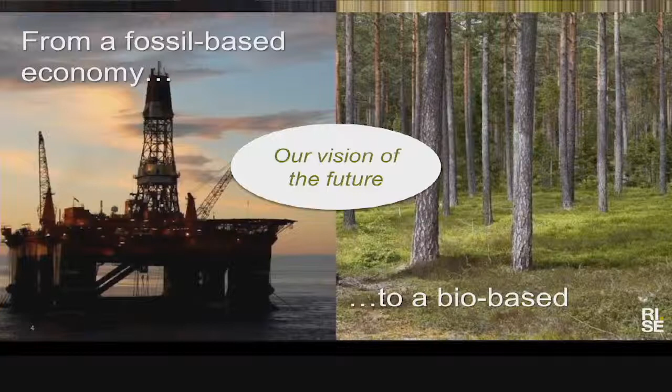We want to get from a fossil-based economy into bio-based. This changed - from the beginning I also used to quote Sheikh Yamani, and we used to say we wanted to go from oil-based to bio-based. But as we are making fuel and oils from the forest, we can't say that. So it's a fossil-based economy we want to avoid, and we want it to become bio-based.

Once upon a time we had dinosaurs, but dinosaurs has also become the definition of something that disappears, that is obsolete and not really adapted to the world they are living in. Observe the dramatic sky, and observe the silhouettes of these dinosaurs to be - I think they are strikingly like, at least I can see the T-Rex in them.

Every second we are pumping 150 tons of crude oil, which is ex-dinosaurs and their nature. 95% of it is burned, 5% is used to make materials or chemicals.

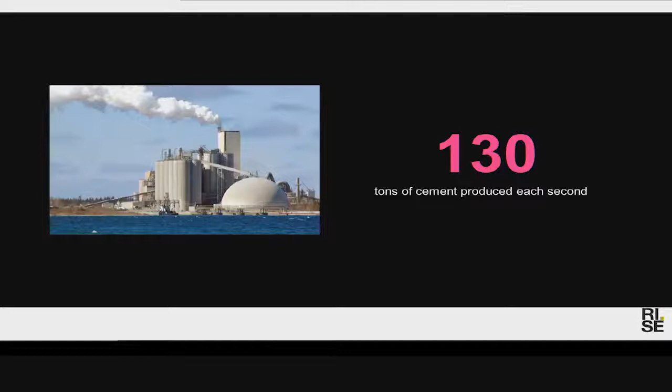But this is our competition if we want to construct and build. Every second we are producing 130 tons of cement, which is then mixed with gravel and other things to become concrete. Each second, it equals 130 tons of carbon dioxide produced.

And then I sound like a sect preacher when I say that we are producing 3,000 tons of cellulose each second. Cellulose is binding, collecting, and storing carbon dioxide. So of course we should work with cellulose. It's not all cellulose that you can find in trees, but trees are a big collector of carbon dioxide and a big source for cellulose.

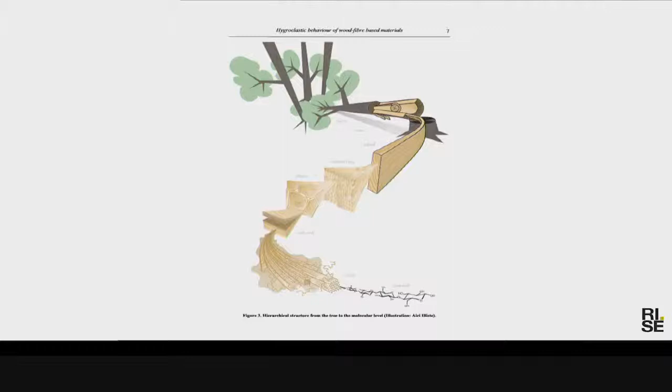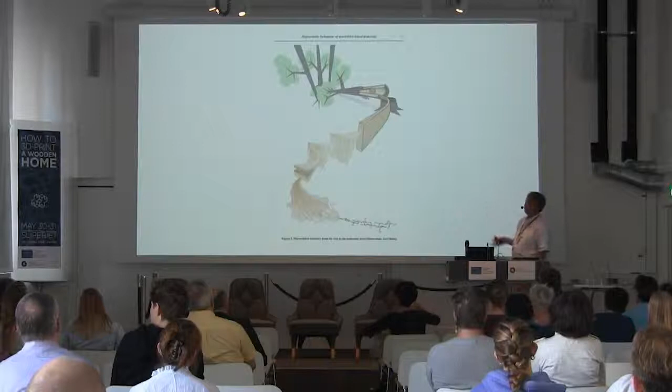And you saw this, or a type of this. We have the forest. We are making, using round timber, construction timbers, and then we are disassembling it into fibers and fibrils, and also using the nanocellulose, the sugars, or the lignin, which is the glue that binds the cells or fibers together, or the hemicellulose or extractives. So we use the whole tree more or less, and especially at Processum you are a biorefinery taking care of all the parts. Most of these parts can be used for construction.

And the question David raised - how do you define wood? We say wood-based, or we think that anything that we take from the tree, we can call it a wood-based material.

We got the question about CLT, or cross-laminated timber. Solid wood as CLT, timber, or glulam - it's excellent building material, and they should continue to be used, they are really excellent materials. But if we want to go further, we have to replace a lot of concrete or oil-based materials.

There is an increased claim for recycling. We have to think, how can we recycle materials? How can we make a cyclic economy out of this? We need to enhance the property space. If we want to replace a lot of materials with cellulose, we also have to give cellulose different properties. We have to produce materials that can do other things.

I'm a material scientist, and I would tell you that materials are boring and not interesting at all. But their properties, wow, that's something. So I'm interested in how we can tweak the properties, how we can combine material properties into new combinations where we can replace or make better design, better products than we have done so far.

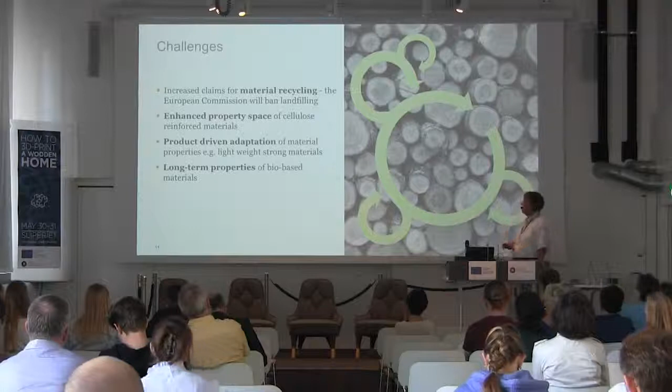And the long-term properties of bio-based materials is tricky. Sometimes you want to compost it, and sometimes you want it to last for hundreds of years. So we have to be able to control it.

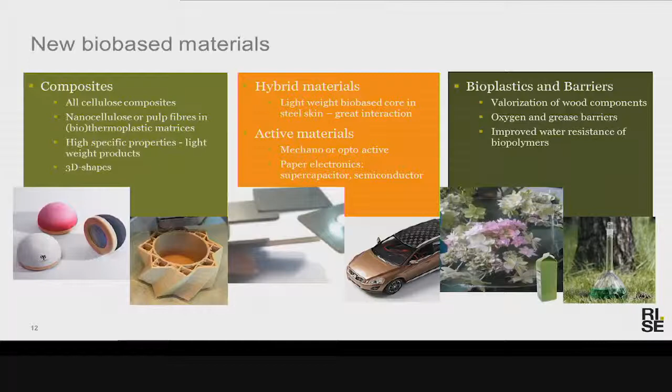These are the types of bio-based materials that we are working with. We're working with what we call all-cellulose composites - that's sort of binding fibers or sawdust or other wood components together using nanocellulose. We are using nanocellulose in thermoplastics. We are making all kinds of interesting things. We are making biocomposites where we put a metal skin on them and we get steel properties at a third of the weight of steel.

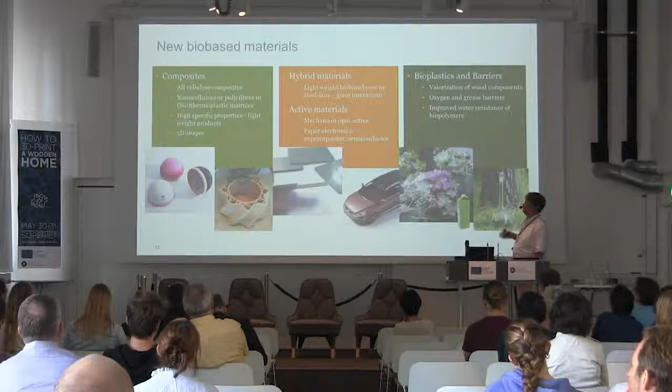We make materials that can interact on some kind of stimuli. They will move or change color or shape. And we are making bioplastics. We are making films. We are making all kinds of things. And this is sort of what's already known.

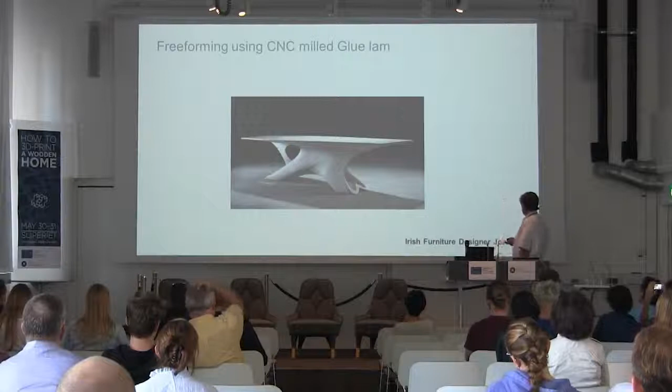Brave New Wood, we had a project. We are working on making wood composites that can be extruded. This is what's done with Joseph Walsh, who is doing the CNC milling. We had a question: why can't we continue with CNC milling? I think if we want to make exciting shapes, change forms, and have another design language, CNC is fantastic.

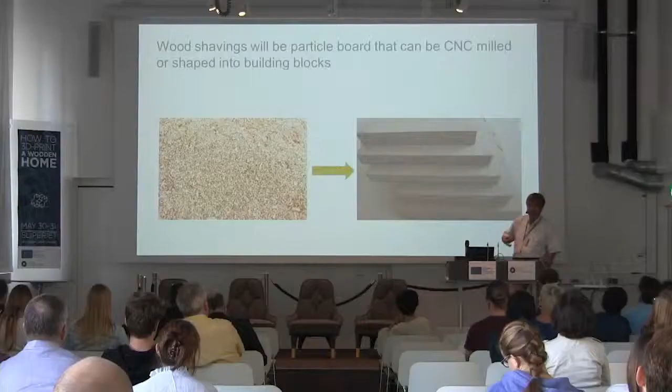But it's subtractive, and you get a lot of shavings. And of course, this is an excellent source for making particle boards that then can be CNC milled and so on. So we can take care of everything if we continue that way.

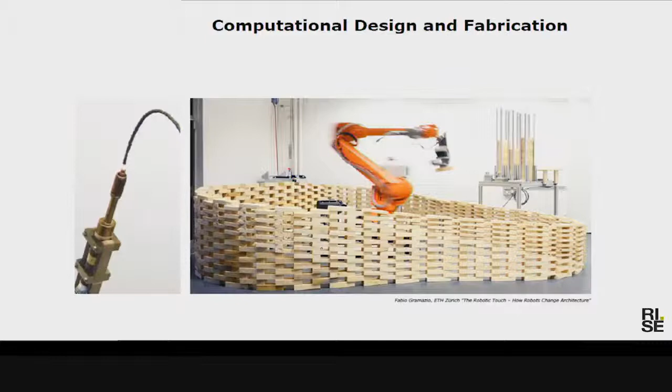There's happened a lot of things with computational design and fabrication. This is from Gramazio Kohler at ETH. They have robots that are laying bricks, for example. And this is the biggest wooden roof that has been constructed completely by robots. It's a gigantic, fantastic roof and ceiling at the same time.

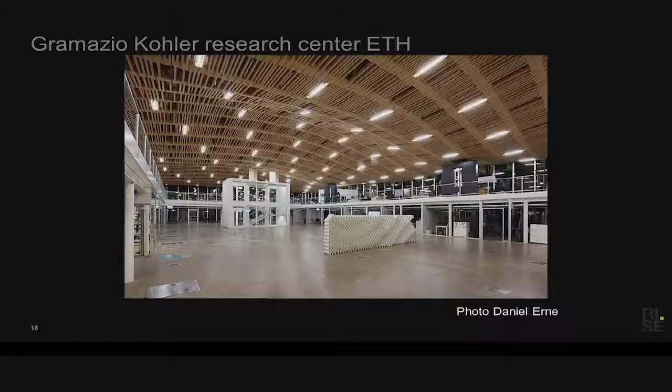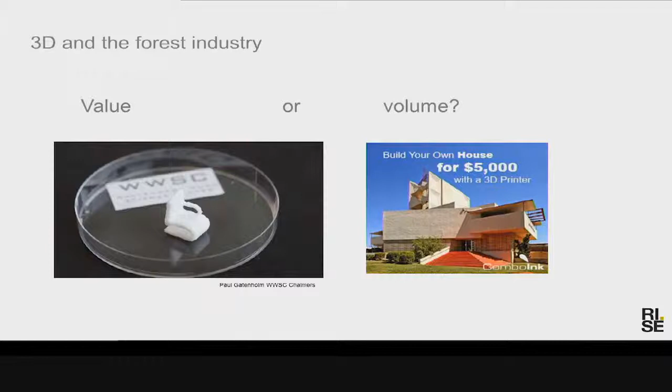And then I've been asked by our forest industry: is there any future in additive manufacturing? What should we do? We have Paul Gatenholm and the Wallenberg Wood Science Center. They are printing in nanocellulose, trying to make spare parts like noses and ears or organs. That's not a big volume, and our industry, sorry to say, cannot handle a few millions in profit. It has to be billions in order to make them understand.

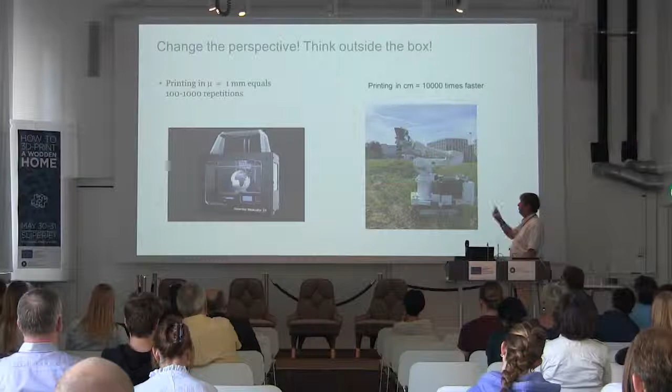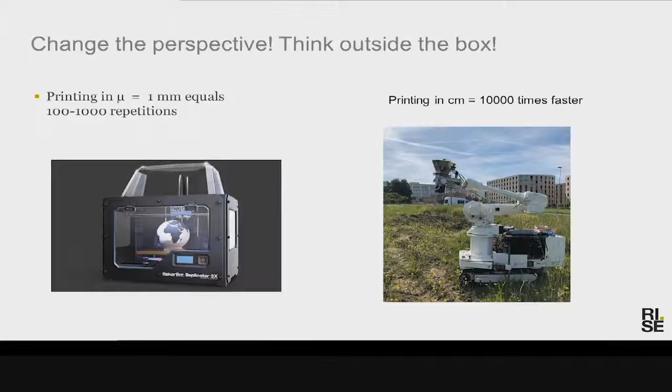So volume, maybe we have the volume in the construction and building part. And we also think that we have to think outside the box. When I visited ETH in Zurich the last time, it's a fantastic campus. They have cows grazing around the buildings. But this day I found a robotic arm on large feet walking around on the grass. They are going to construct a building using this robot out on the field.

But if we want to continue to build on this, if we have super light, strong materials, we can build on top of the old constructions. Many of the big cities are on river deltas. It's not very good ground. You have to put poles into the ground 30, 40, 50, 60 meters down. If you have lightweight materials, you don't have to. You can construct on land that was not good for building big concrete constructions.

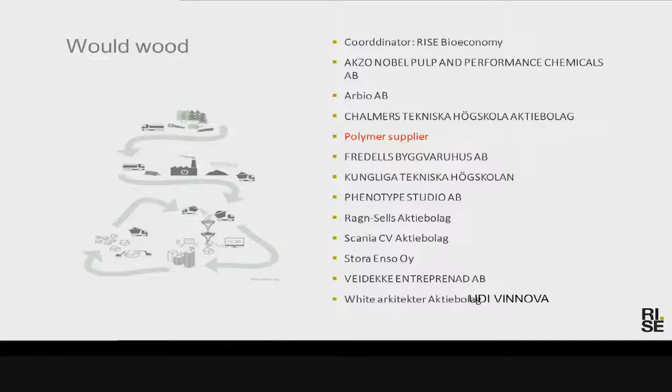And we just got granted, and we will actually start tomorrow, a project called Would Wood. It's about 3D printing with tree material, for the construction and building industry.

It's RISE. We are coordinating, but also Akzo Nobel, pulp and performance chemicals, they are taking care of the fireproofing and some performance chemicals. We have Arbio, which is Svensk Trä. They will take care of the communication part and make sure that it's spread to everyone.

We have Chalmers, the architectural school, which is a lot about the digital part, the digital tools. And then we have a polymer supplier, which we are negotiating with right now. Fredells, a do-it-yourself company, they want to look at the business model.

What happens if they have a giant 3D printer? If you want to make a balcony or a terrace, you can go and have your individual things printed out, or you can repair some furniture if you need a new leg for a favorite chair.

It's KTH, the Department of Mechatronics and Machine Design. We're going to work with the design of the printer heads. We have Phenotype Studio, who are architects specialized in wood and digitalization.

Ragn-Sells, they are recyclers. They want to know how we are producing these materials, how we are producing the artifacts on buildings, so that they know how to take them apart.

And then we have the truck company, Scania, because we think it would be very hard to print anything for the building and construction market and get it approved because of standardization things. But printing something for a truck interior is much easier. So that will be the thing that we can show, so that it will not just be a promise.

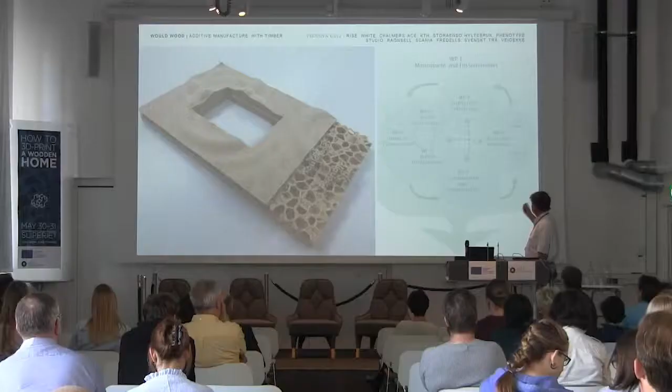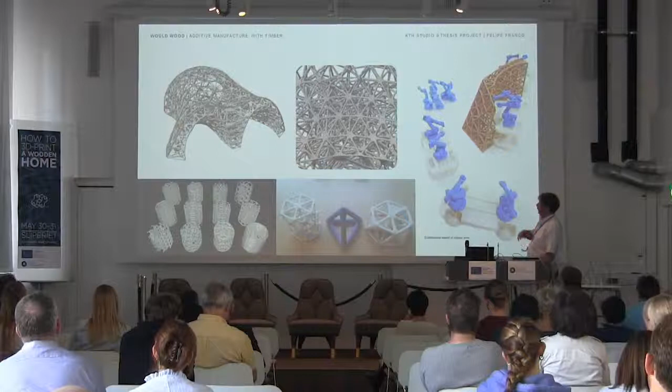We've done some pre-studies on when it's worthwhile to look at additive manufacturing. We've been looking at the space frame and how to do it. We didn't have the Magpie, but we did what we could. We've been looking at what kind of elements can be used when we want to build lightweight structures which we can put skin on.

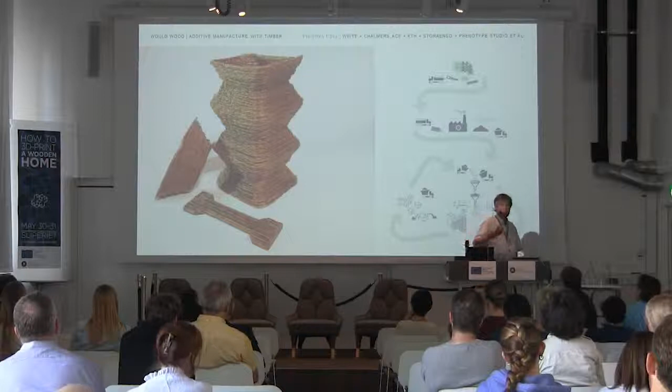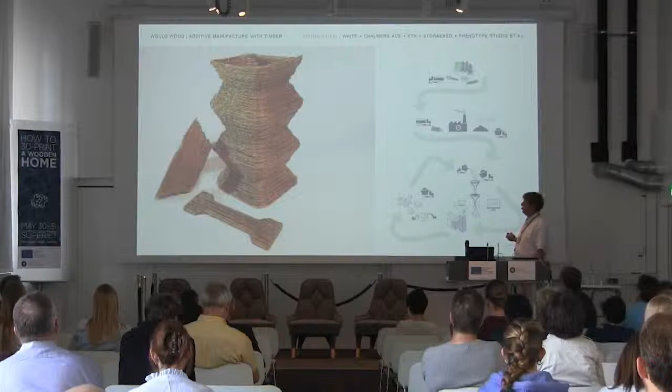We've also developed a new printer head where we can print with rope or yarn, which gives us fiber direction, so we can give materials different properties in different directions and control the strength in completely different ways. We've done this with both thermoplastics and thermosets. With a thermoset, we can build the space frame really three-dimensionally without doing layer-by-layer printing.

We've also developed, from wood at Rise Bioeconomy, carbon fibers from lignin. With this printer head using paper yarn, we can also feed man-made fibers like rayon or carbon fibers, giving us very strong reinforcement fibers in the material, because that's one of the big problems when printing with thermoplastics.

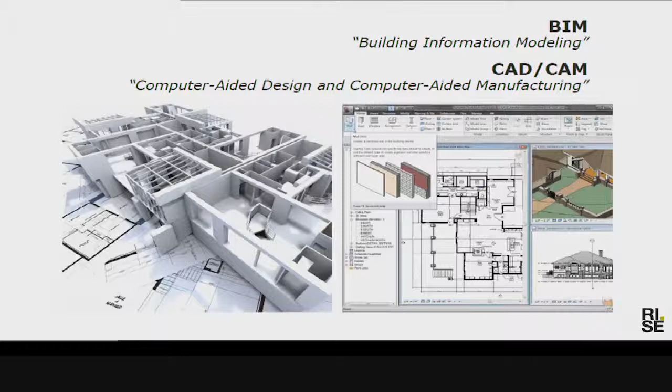Digitalization enables us, and we really believe this is the moment where we can do a lot of things due to this. You have the CAD, the CAM, the BIM, but we have to get them to work together. That's mainly the biggest task for our project, to make sure we get all these things going together.

The approach we have in what we call material design is research, design, and development. We think it's important that the design part comes before the development part, because we need the communication and discussion. A material consists of components, and the components are processed in different ways and mixed, which gives a structure to the material, and the structure gives the properties, and then we have the products.

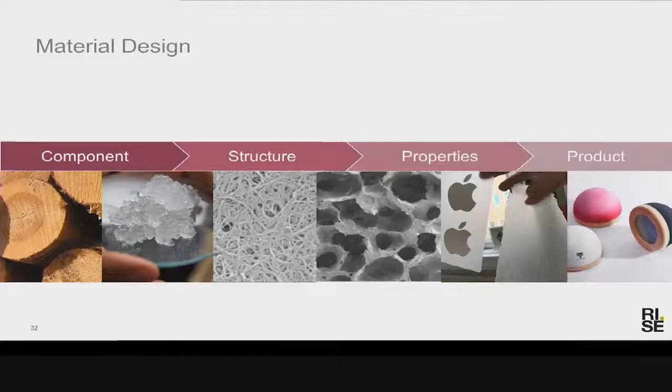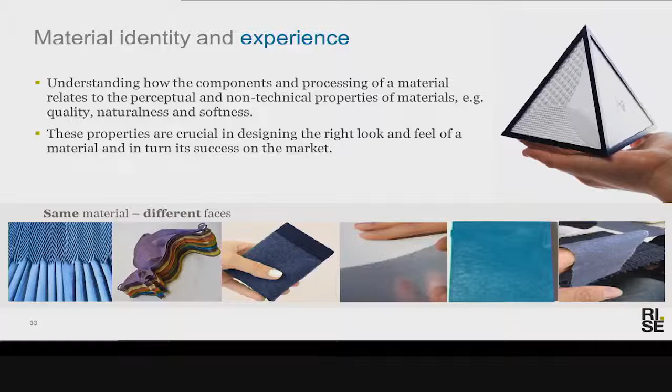It's also very important how you experience these materials, as Elvin said. If we introduce materials in the wrong way... and especially Scania is thinking about the design that makes the client accept the 3D printed expression. Because if you hide the 3D printed thing with a very expensive surface treatment, you lose a lot of what you gain by doing the 3D printing.

We can spin, we can make foams, as we saw from David also, we can extrude foams, and we can decide which size we want for the cells, whether they should be open or closed. We can do injection molding, hot pressing, a lot of different things. With the same identical material, we get very different properties depending on which production process we use.

But it's not enough. We cannot get all the desired properties just by having a structure on the material. It also depends on the components we use to mix into the material. If we want to make it hydrophobic, for example, we need to add something. So there are at least three components, if that's the right word: the material components, the material processing which gives the structure, and the design to achieve the properties we're looking for. All these have to communicate with each other.